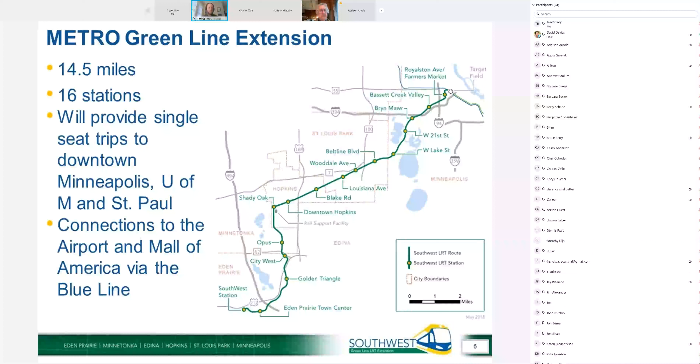A lot of folks are familiar with these first slides, but we always like to remind people of what we're doing here. This is the Southwest Light Rail project, an extension of the Metro Green Line. It's a 14.5-mile route extension with 16 stations. We always want to focus on the fact that in building this out, you're not just providing a single seat trip to downtown Minneapolis along the route, but a single seat ride that continues to the University of Minnesota and St. Paul, connecting into the Blue Line in downtown Minneapolis to make connections to the airport and Mall of America.

We are focusing on the Bryn Mawr area tonight. If you have questions about other areas or topics, feel free to put them in the chat. If we don't get to those tonight, we'll focus on Bryn Mawr and construction, but we can follow up on anything else. This is where we're headed with the Bryn Mawr station, one of the stations along the line. It's between the West 21st station, just to the south near East Cedar Lake Beach, and to the northeast, the Bassett Creek Valley Station at Van White Boulevard.

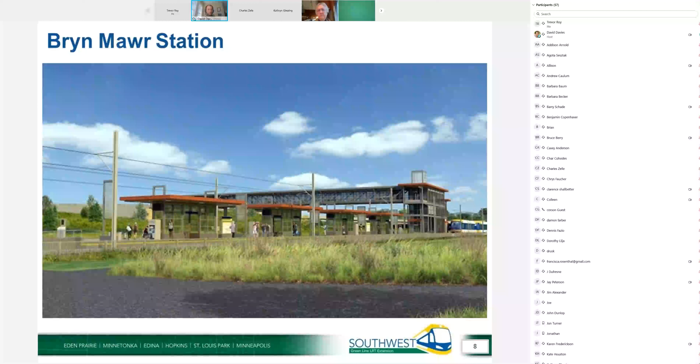A couple images here - a lot of folks have seen these renderings, but it's good to show that the station itself is at grade, down in the core rail corridor. One of the unique features for the Bryn Mawr station is the pedestrian bridge, with access using elevator and stairs, and a pedestrian overpass over light rail and freight rail to connect into the Wayzata Boulevard, Penn Avenue intersection. You can see in the background the pedestrian bridge, that crosshatched building, which is a very unique function we'll touch on today in terms of construction progress.

A couple more views. This shows an angle from the platform, entering the platform, and you can see off to the left side of the screen the pedestrian bridge as well. To the right, you see one of the light rail tracks and light rail on those tracks.

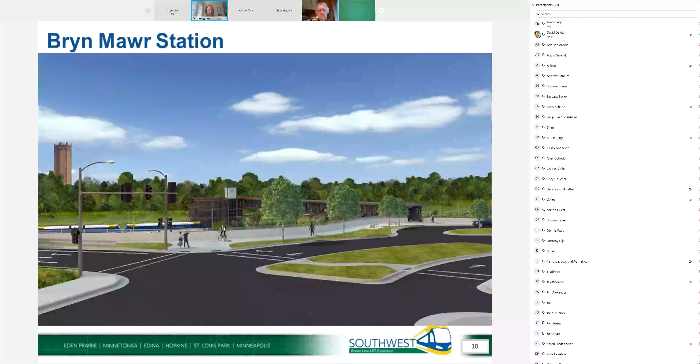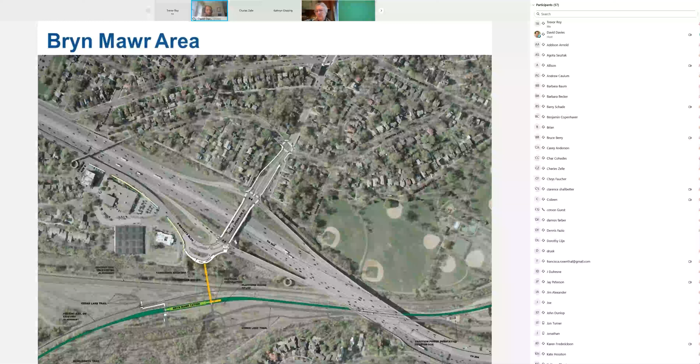This is one more view that shows the intersection of Penn and Wayzata, which includes the passenger drop-off. This station has a passenger drop-off area. If I go back here, it's small, but you can see the yellow line is the pedestrian overpass, and it connects into that white half-moon shape, which is the sidewalk and passenger drop-off area. Folks are able to get out of the main through traffic to get on 394 in order to pick up and drop off light rail passengers.

I also wanted to include the station to the east, the Bassett Creek Valley Station, which has a connection into the Luce Line trail. It also has that vertical circulation elevator and stairs into the Van White Boulevard bridge to allow for accessibility there.

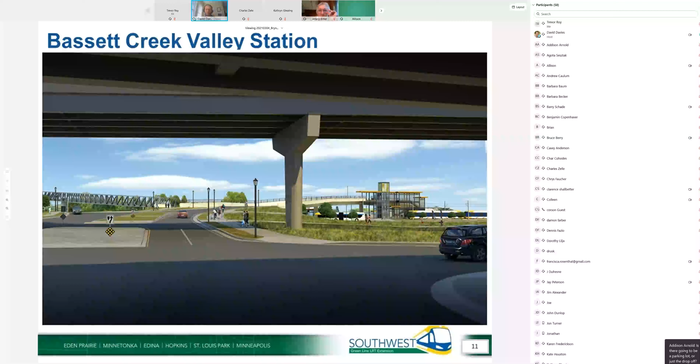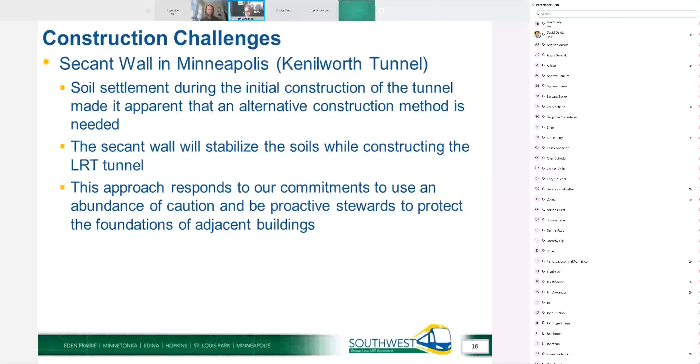So I know there are a lot of questions out there about what the delay is going to be and how much it's going to cost. We're working on that right now, so we don't have numbers at this juncture, but we will be able to get those fleshed out over the coming months here.

The other issue, here's a visual. Maybe David, go back to 17 there. Thanks, David. That just shows the location of where that's located. The south end, about a 500-foot section on the east side of the tunnel, and the overall tunnel is about 2,500 feet in length, thereabouts. So maybe go to the next slide.

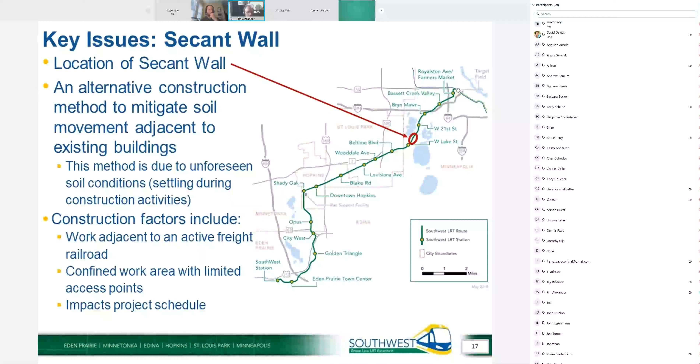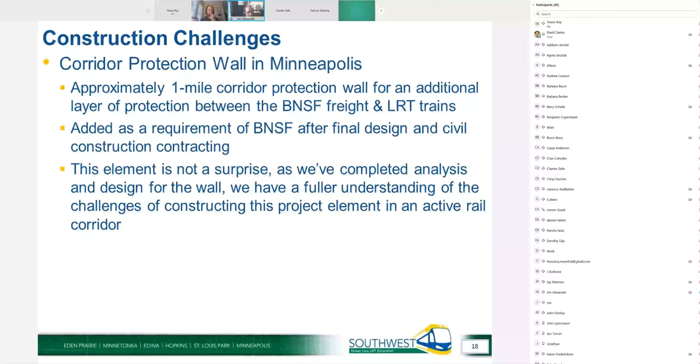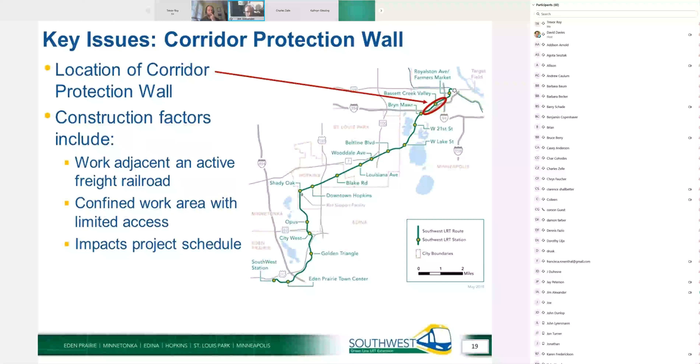It's also going to be additional costs, of course, because we're building an additional feature here. We don't have those numbers lined out yet. We're working with the contractor on both the schedule and the costs of these items. But one thing I want to point out, Dave will have a couple of slides on this. I think there were some questions about the good work that was done back in 2017 on the aesthetics of what this wall is going to look like. We really haven't changed anything in our plans for that, that's maintained, and we can talk about that as we get to those slides. The next slide shows the location, essentially the area between Bryn Mawr and 94 as it crosses over the alignment. So I'll hand it back to you, David.

Thanks, Jim. We can address any questions a little bit later on that. I just wanted to continue picking up where Jim left off with the construction in general, construction of the corridor protection wall that's going to start up here. These are the big primary elements that you can expect to see activity regarding for the Southwest Light Rail project in 2021. First and foremost, as Jim mentioned, the corridor protection wall - it's going to take quite a long time to build this mile-long element of the project.

The contractor is planning to get started with that this spring. One of the starting points, the westernmost point, is just east of the Bryn Mawr station, extending out to 94. So the contractor has a lot of work ahead of them for that element, and they want to get started as soon as they can. So residents who have a view into the rail corridor, or may be walking along the Cedar Lake Trail in that area, will certainly see activity here for the foreseeable future.

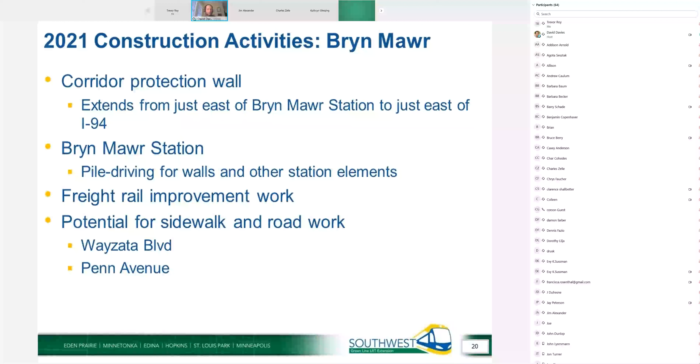It's especially important in a place like Bryn Mawr as we move up Penn Avenue, because there are residential and business accesses in that area. We know how important it is to minimize disturbance and impacts there as we plan for that work.

This is just a map showing what's going on this year, which might look familiar if you've signed up for our construction updates. It extends over to the Royalston area, where we'll continue work at the Glenwood Avenue bridge site, but the focus is on the Bryn Mawr and Bassett Creek Valley station area. Primary takeaways for this group are the corridor protection wall, some station construction, and freight rail work.

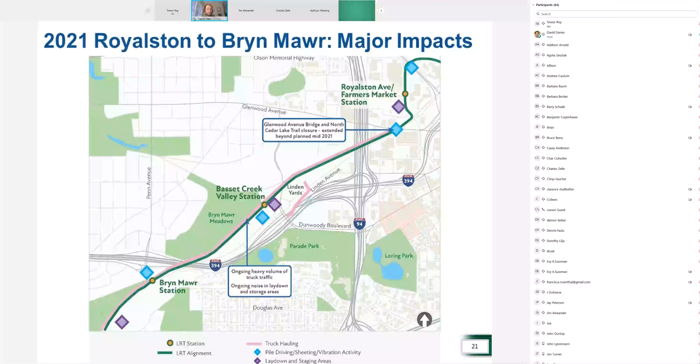One piece of this, especially with the rail corridor protection wall, is pile driving, which can be disruptive with noise and potential vibration. If you're close to the Bryn Mawr station area, that's likely going to be felt mostly by a couple of the nearby businesses.

The weekend work in the rail corridor is something we've analyzed a lot, since it's been folded into the project with the corridor protection wall, to figure out how to minimize overall impact and delay. One way the contractor and project office feel they can really reduce that delay, and therefore reduce impact to the community by getting the project done quicker, is to work on Saturdays specifically at this corridor protection wall site.

Work will progress up and down that site area. This is something we are looking into and planning for, and we want to make sure the community is very aware of this potential for Saturday work as we move forward with construction on the corridor protection wall. We can talk about why that is in a moment.

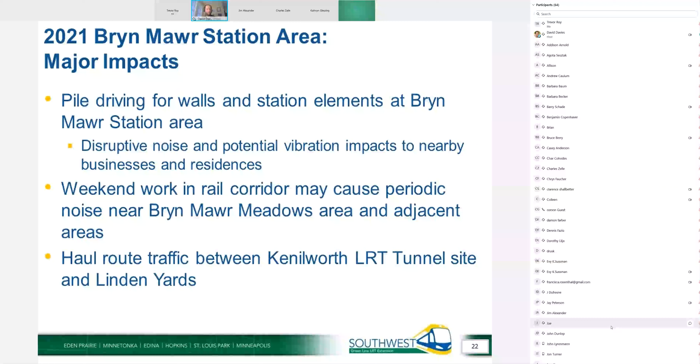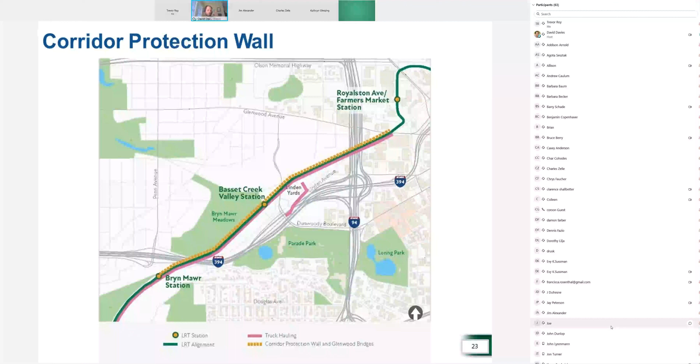So just getting back to the corridor protection wall, I know that as Jim said, a lot's been discussed. This process has been ongoing for a number of years, and there was a specific process undertaken in 2017.

I just want to touch on the primary benefit here. Again, I mentioned the Saturday work — we don't take this lightly in terms of asking to work extended hours or on weekends, but the primary benefit here is a time savings of over 6 months of general construction activities in the area. So by working those Saturdays, we'll be able to save a pretty significant amount of time overall in getting this project done.

The major activities we anticipate are earthwork, so a lot of moving soil around, preparing the site, excavation, the wall itself — the kind of piles that are going to be driven for this are going to be drilled — and then there's going to be a lot of concrete placement. Certainly there's a lot of concrete to be poured to make that wall.

High vibration activities may occur in the vicinity, as we talked about, for the Bryn Mawr station and for the walls in that area. Some high vibration activities are occurring for pile driving, but high vibration activities are not permitted on Saturdays for construction. So if we are conducting high vibration activities, those are during the normal working hours of 7 to 6, Monday to Friday.

Just want to point out too that this site is relatively isolated. I'd say the folks just west of 394, in that little stub of the corridor protection wall, probably have the best view of that piece of work, but the majority of the work for this wall is going to move east toward I-94, really nestled up near 394, which is already a pretty noisy and active element there.

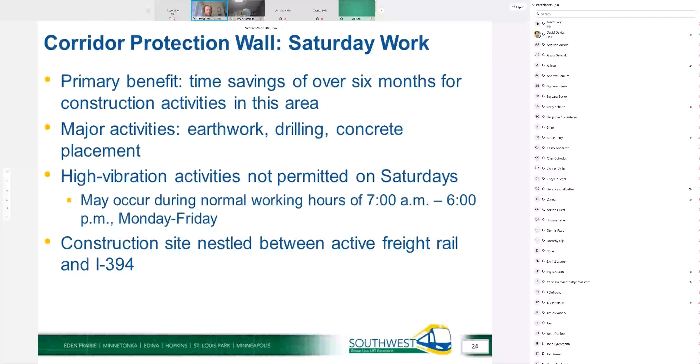Okay, just running through — we can touch on this too a little bit in Q&A — but just wanted to run through what Jim was talking about, the design history of the corridor protection wall, just showing you a little bit. We do get questions about what happened with the CPW and how we're only hearing about it now.

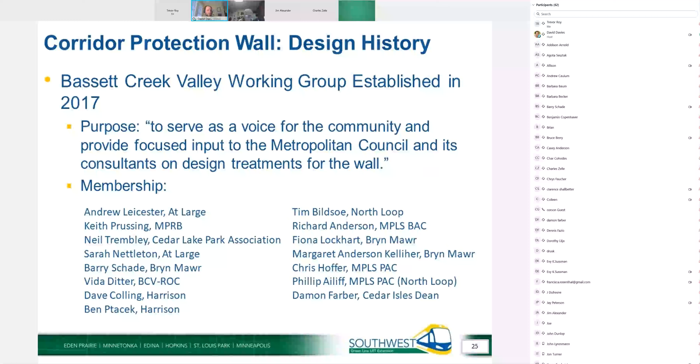So we did have this process with the Bassett Creek Valley Working Group. I was not on the project at the time, but we do have folks on the call that certainly were a part of this. In 2017, this working group was tasked with working through what this wall is and providing feedback, focused input, as the slide says, about what the wall is going to look like. I won't read everybody's names here, but you can see this is a group that involved membership from Bryn Mawr, as well as other communities in the area and other entities like the Park Board and the Minneapolis Pedestrian Advisory Committee, just to diversify the perspectives contributing that input.

This work carried over from ideas from the Kenilworth landscape design process, which was also an intensive process to work through and push forward a specific design for landscaping and plantings in the Kenilworth corridor. Walking tours and public meetings were some of the ways in which this group worked out how this wall was going to look, and some of the things they looked at included textures, graphics, and plantings, carrying over some of those ideas from the Kenilworth design process.

Eventually, that working group's recommendations were considered and incorporated into the design. So things like the wall pattern, the station name plate that's going to be at the Bassett Creek Valley Station, elements of vegetation, and the addition of more vegetation in places like the Bryn Mawr Station. So these features are being implemented.

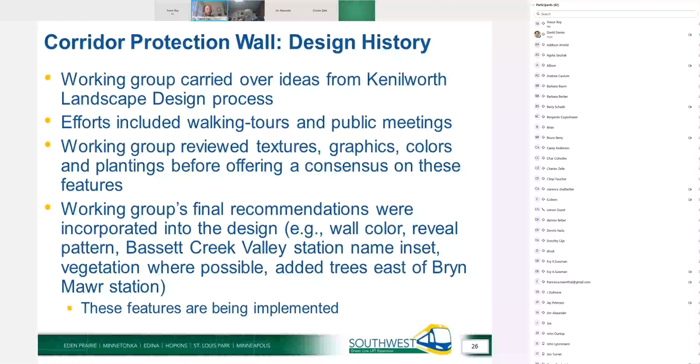As Jim said, the design hasn't changed. We just want to make sure that's very clear to folks, because I think there were some questions, because this was getting brought up in the scope of the delay, that this was somehow something new or things had been changed. Just wanted to run through these; we have these more as reference slides in case people have questions. We can look through them, but this is just some of the information. A lot of this was actually developed back in 2017, but we wanted to make sure people were seeing this, even folks that had already been through that process before, or people who had been here for the first time, seeing some of the things we considered and some of the results.

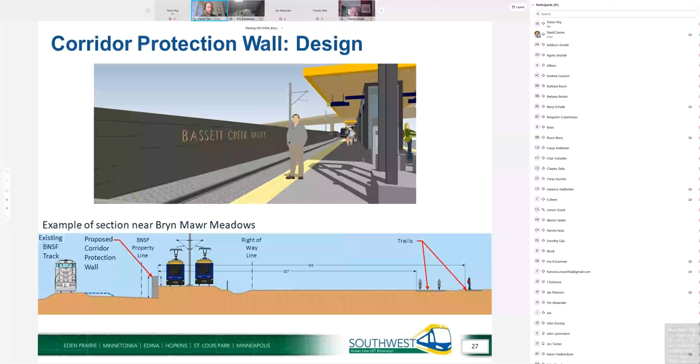So this is a rendering of the Bassett Creek Valley Station and the wall in proximity to the station platform. And this just gives you an example section of where the wall's location is in proximity to the trail and the future light rail and existing BNSF rail.

We had a bunch of different cross sections that I'm just going to scroll through relatively quickly in order to get to our Q&A, but just giving you an idea of, again, scope and visual aspects of where the wall is situated at different points.

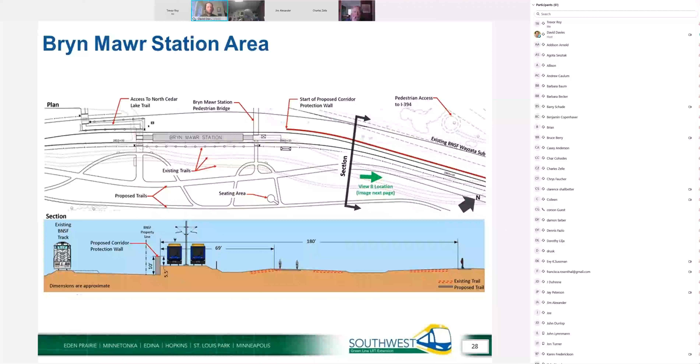This is more on the west side near the Bryn Mawr Station. This gives you an idea of what the wall will look like when it's done. You can, especially on that bottom slide, see in the background what it would look like from that trail area.

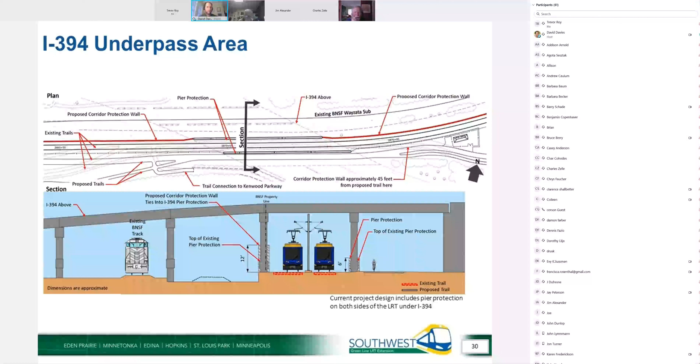The wall ties into the existing pier protection that will be built with light rail under 394, and so that just shows you that. This gives you an idea of where the wall would be situated from Bryn Mawr Meadows.

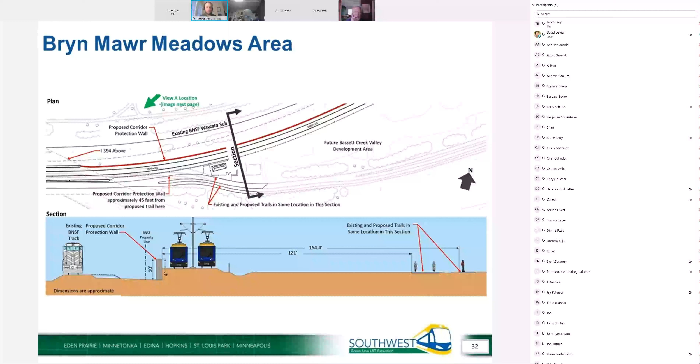Again, this is an area as we're moving out from under 394 and into the Bassett Creek Valley area. This shows you another cross section of how the wall is situated, and gives you an idea of where the wall is situated in relation as it approaches the Bassett Creek Valley Station.

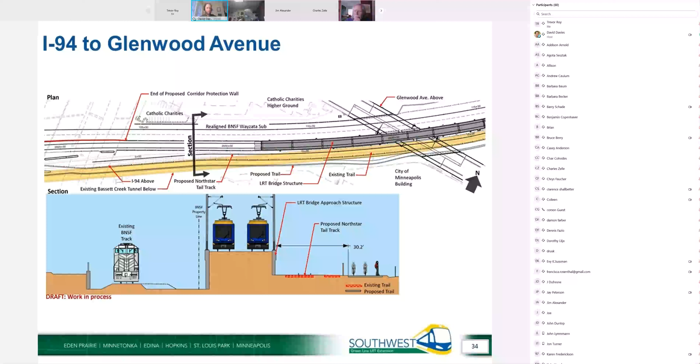And as you come up to the I-94 section, the corridor certainly changes. It narrows up considerably with the proximity to the pedestrian, the Cedar Lake trails, and grades change as the rail is down below as light rail is elevated a bit.

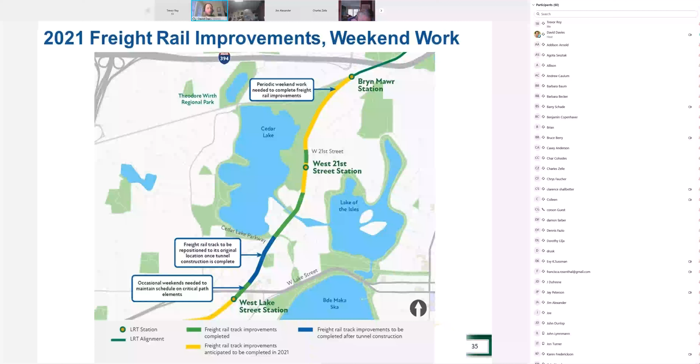As we noticed last year, some of that work can certainly be very noticeable to the surrounding community, some of the equipment that they use to upgrade that rail infrastructure.

Giving you an idea, though, that it really is worth it. It is part of the project scope, and you can certainly tell the difference between the old and new freight rail track. So a good amount has been done already, but we do have some pieces still to do.